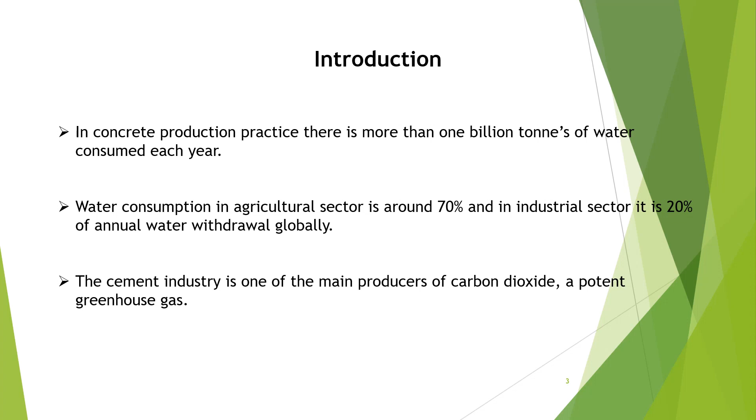Magnetized water. Now let's shift our focus to a fascinating aspect that has gained attention in the quest for sustainable water use in concrete production: magnetized water. Magnetized water, as the term suggests, is water that has passed through a magnetic flux. This process imparts unique properties to the water, influencing its structure and characteristics.

The properties of magnetized water are noteworthy. Structural alignment in one direction: through the magnetic treatment process, water molecules exhibit a distinct structural alignment in a particular direction. This structural adjustment holds significance in various applications.

Increased viscosity and surface area: magnetized water experiences changes in viscosity and surface area. These alterations can impact the interaction of water with other substances, potentially influencing the properties of materials it comes into contact with. Let's visualize this transformation.

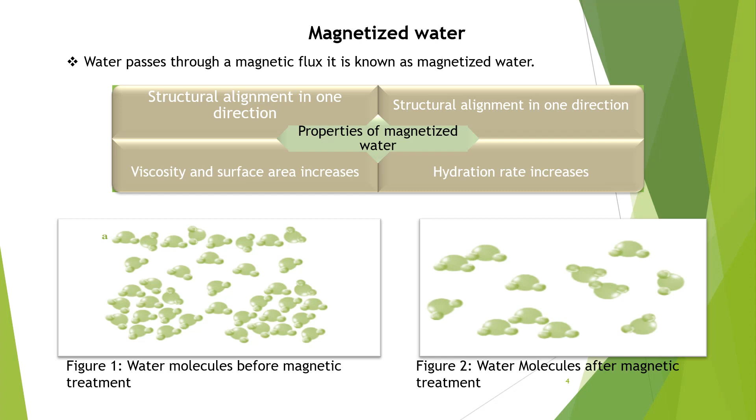Understanding the impact of magnetized water in the context of concrete production is a crucial aspect of our exploration into sustainable practices. As we proceed, we delve deeper into the implications and potential benefits of incorporating magnetized water into the production process. Let's continue our journey of discovery.

Case study 1: Concrete mixes. Let's delve into a concrete case study that explores the effects of magnetized water on concrete mixes, shedding light on its influence on various parameters. In this study, we examined mixes composed of ordinary Portland cement and coarse aggregate with a maximum nominal size of 20 mm and a dry density of 1600 kg per meter cube.

The water-cement ratio was modified for different mixes, with characteristic strength targeted at 30 Newton per millimeter square. Now let's uncover the key findings. Consistent early strength: surprisingly, the early strength of the concrete mixes remained relatively constant even when the cement content was reduced by up to 25%. This suggested that magnetized water may have a positive influence on the early strength of concrete, potentially allowing for resource optimization without compromising performance.

Slump variation: the study observed a rise in slump indicating increased workability, likely attributed to the enhanced viscosity and surface area of water due to magnetization. This change in slump has implications for the ease of placement and shaping during the concrete construction process.

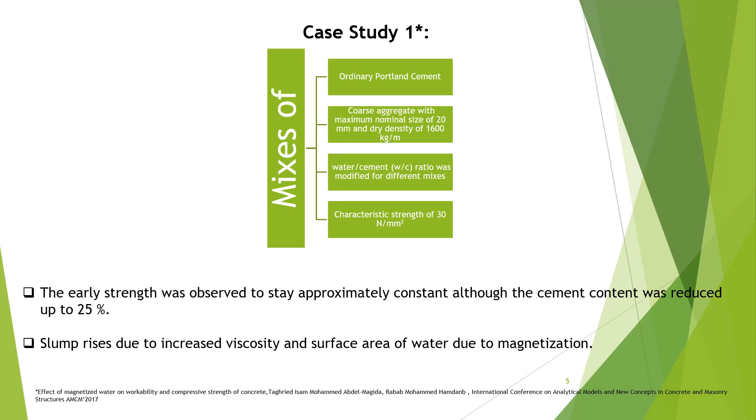These findings from case study 1 offer valuable insights into the potential benefits of incorporating magnetized water in concrete production. As we proceed, we will further explore the implications of these results and their significance in the pursuit of sustainable practices.

Case study 2: Strength development. Moving forward, let's examine another compelling case study, delving into the impact of magnetized water on the strength development of concrete. Here are the key findings from case study 2. Strength behavior comparison: the study indicates that magnetized water concrete exhibits a strength development pattern similar to that of normal water concrete. It displays high strength at early stages and comparatively lower strength at later ages.

Compressive strength enhancement: with the addition of magnetized water, the compressive strength of concrete showed a significant increase, approximately 55.7% at 28 days and around 51.8% at 1 year. This suggests that the use of magnetized water positively influences the early and long-term strength characteristics of concrete.

Short-term strength improvement. The study observed a notable increase in short-term strength at 28 days and improvements of 12.62%, 21.5%, and 45% in split tensile strength, flexural strength, and impact strength, respectively, when magnetized water was used in concrete mixing.

Long-term strength enhancement. In the long term, concrete exhibited increased strength in tension 12.7%, flexural 29.3%, and impact 42.2% when magnetized water was used as the mixing water. This underscores the sustained positive effect on various strength parameters.

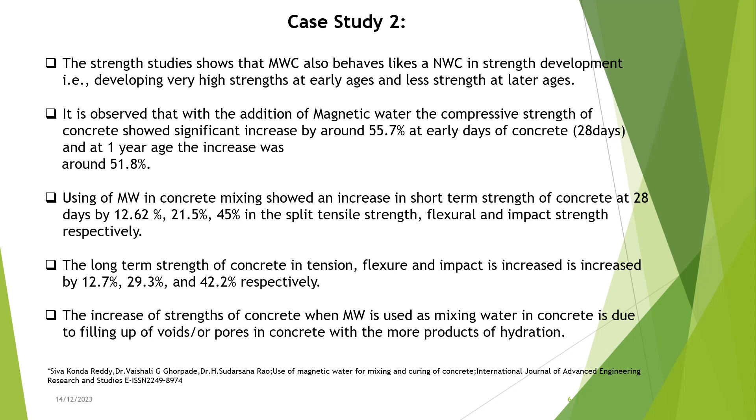Case study 3. Efficiency and advantages. Our journey into the impact of magnetized water on concrete would not be complete without delving into the efficiency and advantages observed in case study 3. Here are the key findings of case study 3. Compressive strength increase. Concrete prepared and cured with magnetized water exhibited a higher percentage of compressive strength compared to normal water concrete. This suggests that the use of magnetized water contributes to enhanced strength properties in the concrete.

Efficiency enhancement. The percentage efficiency of concrete samples cast and cured with magnetic water demonstrated a remarkable improvement, being 20% more efficient than conventional concrete. This efficiency gain highlights the positive influence of magnetized water on the overall performance of the concrete.

Reduction in cement content. An essential advantage observed is the reduction in cement content by up to 11% compared to conventional concrete. This reduction not only contributes to the efficiency of the concrete but also aligns with the sustainable practice of minimizing resource use. High strength properties. The strength properties analysis indicates that magnetized water concrete consistently produces higher strength compared to normal water concrete. This is a pivotal factor in considering the long-term durability and performance of concrete structures.

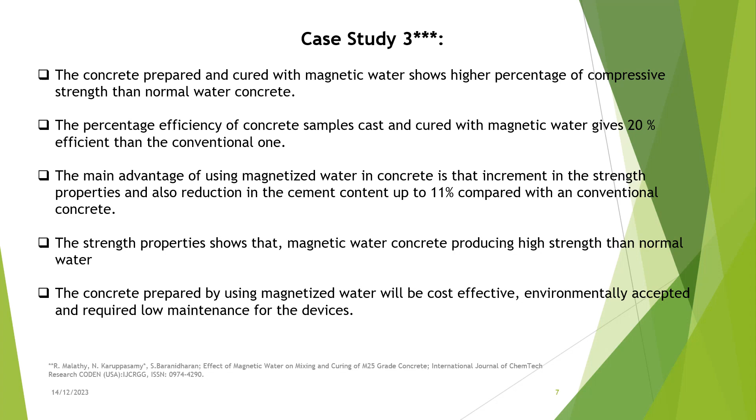Cost effectiveness and environmental acceptance. Beyond strength considerations, using magnetized water in concrete preparation is found to be cost effective, environmentally accepted, and requires low maintenance for the associated devices. These aspects contribute to the feasibility and sustainability of implementing magnetized water in concrete production. As we wrap our exploration of case study 3, we will reflect on the broader implications of these findings and their significance in the realm of sustainable concrete practices. Let's proceed with our analysis.

Benefits of using magnetized water in concrete. Now let's consolidate our understanding by highlighting the key benefits of incorporating magnetized water in concrete production. Increased compressive strength. One of the primary advantages is the notable increase in compressive strength. The application of magnetized water contributes to enhanced strength properties in concrete, promoting durability and long life of structures.

Enhanced workability. Magnetized water influences the viscosity and surface area of water, leading to the improved workability of the concrete. This enhanced workability can simplify the construction process, allowing for better shaping and placement of the material. Reduced concrete weight. The use of magnetized water has the potential to reduce the weight of concrete structures. This reduction can be beneficial in various applications, including transport and construction, where lighter materials may offer logistical advantages.

Reduced cement content. Another significant benefit is the reduction in the cement content by using magnetized water in the concrete mixing. There's an opportunity to decrease the reliance on cement, contributing to resource efficiency and aligning with sustainable practices. These benefits collectively underscore the potential of magnetized water as a valuable tool in optimizing the performance, efficiency, and environmental impact of concrete production. As we conclude our discussion, let's reflect on the broader implications and the future landscape of sustainable concrete practices. Let's move forward.